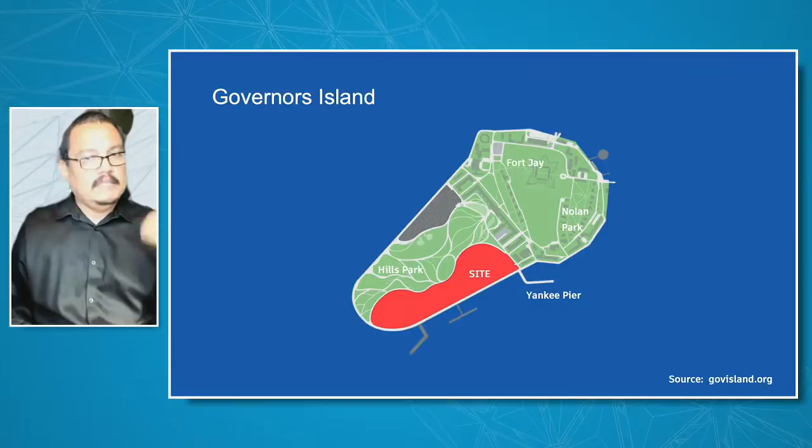The challenge imagines a resilient, transit-oriented development along a revitalized waterfront. Participants are asked to document their creative process on the following: a vision for a climate change research center that includes a facade design balancing energy and thermal performance, systems that target net zero energy, a structural design that targets resilience to storm surge and rising sea levels, public waterfront amenities, and a redesigned ferry terminal station.

So with that said, I'm very excited to introduce our first participants. Steve Smith is a senior technical designer at Walter P. Moore. He brings 20 years of experience designing entertainment venues, performing arts centers, and sport facilities. Steve leads the Walter P. Moore Parametric Modeling Group. Steve, welcome to the Design Slam. How are you today?

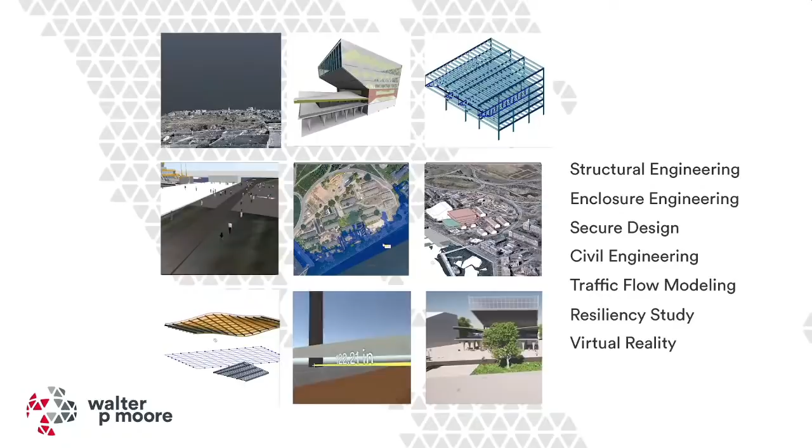Hey, Cesar, it's good to see you again. So Walter P. Moore is a firm made up of a lot of different architects, engineers, and designers—smart people who are innovative, inquisitive, and forward thinking. But what I really like about working here is that there's no egos. People like to help each other and collaborate to solve complex problems, whatever is needed by the client. This helps create a culture where everybody can do what they're good at and what they're passionate about.

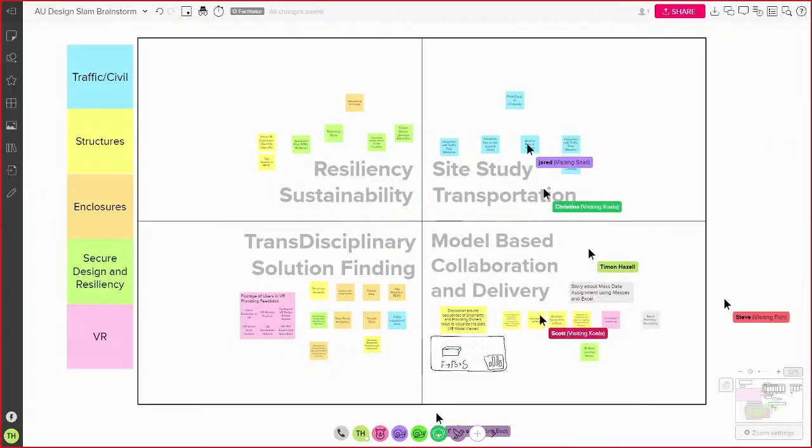When I was invited to participate in the Design Slam, I thought this was going to be 30 minutes to show just my Dynamo chops. But then I saw that we were going to need a bigger team. So fortunately, we were able to collaborate across offices and disciplines, and we assembled a team of 9 people, and then began determining our scope.

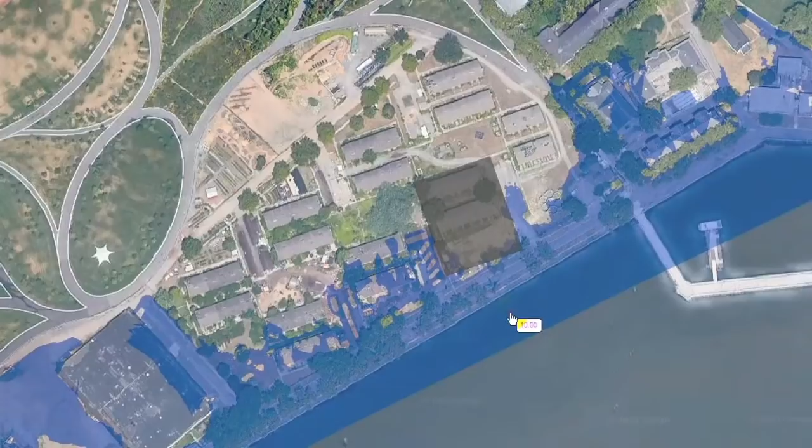We quickly realized there were some challenges here. We could see that the site is an island, so there was going to be problems with getting materials there, but also the risk of storm surge is great. So we looked at an 8-foot storm surge with a 5% probability, that's a 20-year event. We also looked at a 10-foot storm surge, which would be like a 50-year event today. But as sea levels rise, we expect the 10-foot storm surge to be more like a 20-year event in the future.

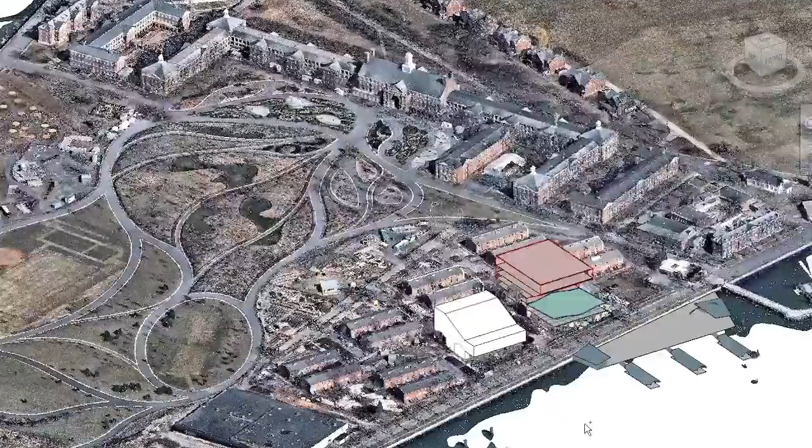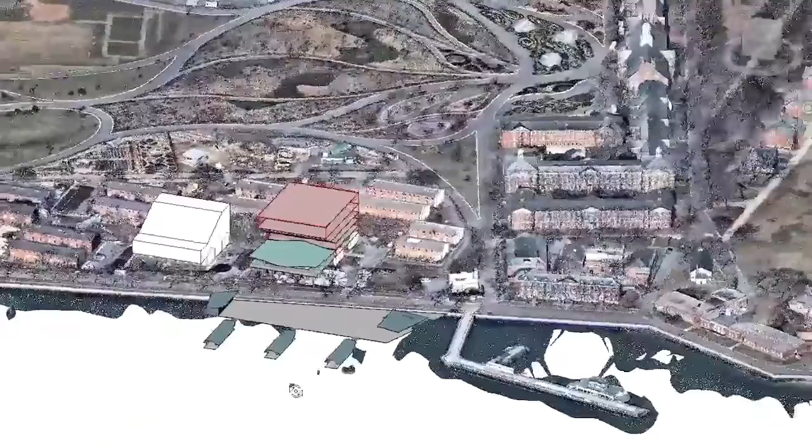Now, the center itself presented its own challenge because at Walter P. Moore, we're an engineering firm. Usually an architect comes to us with a design already in mind, and we just figure it out. Well, we didn't have that to start with. But fortunately, one of our senior technical designers is in New York City, and he's an architect. So Jared Friedman helped us come up with a compelling design for the Center for Climate Change, as well as the site. And from a sustainability standpoint, we decided to reuse some of the existing brick structures on the site.

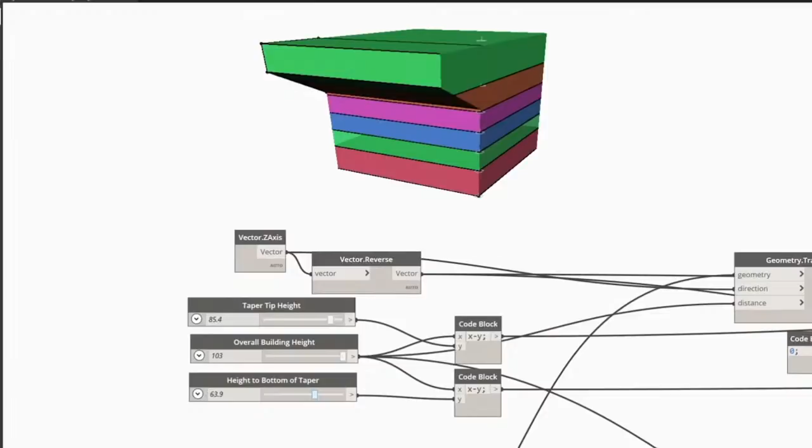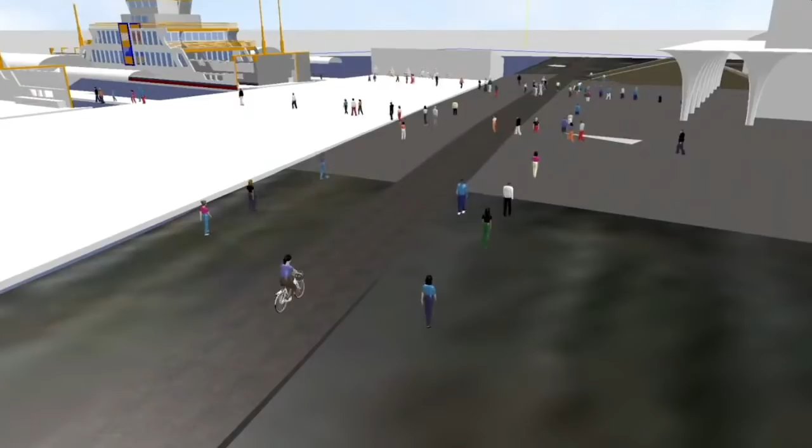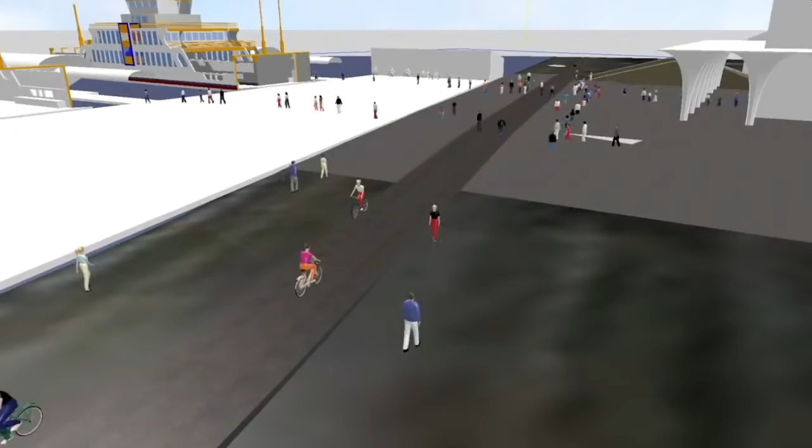The third challenge that we had here was a transportation challenge. So we consulted with our infrastructure group at Walter P. Moore, and we looked at maybe extending the subway service. We also looked at building a tunnel underneath the harbor there from Brooklyn to Governor's Island. But then we started thinking about how part of the charm is the ferry ride, and there really aren't cars there. That's something else that's nice and unique about Governor's Island. So we settled on a boat to bike concept, adding a new ferry dock with a bike rental shop and a cafe.

I'm really, really impressed by the integrated approach of your design solution. Maybe we can dig a little bit more into that.

Steve, how do you measure value and success at Walter P. Moore's digital practice? Yeah, so that's an interesting question. So like other firms, we do embed loggers inside of our definitions so we can see what's being used, who's using it. Then we're able to parse that data with Power BI to see trends when it comes to what's actually being used. We also ask our project managers to rate each one of their projects based on its digital activity or digital practice, with 0 being completely manual, no digital practice, and the other end of the spectrum being completely digital. Now, as far as success is concerned, I don't think we quantify it necessarily the same way.

Success for us has a lot more to do with our client experience. So, did we adhere to the budget? Were we able to make our project partners happy with what we delivered? Perhaps we were able to deliver more to them earlier. Were we able to accelerate the schedule? Perhaps we were able to limit RFIs, or solve problems digitally before they actually arose in the field. And so I think we measure our success a lot based on repeat business. And internally, when we do get that repeat business, are we delivering more to them each time we're hired? Are we always increasing our value to the client and to our partners?

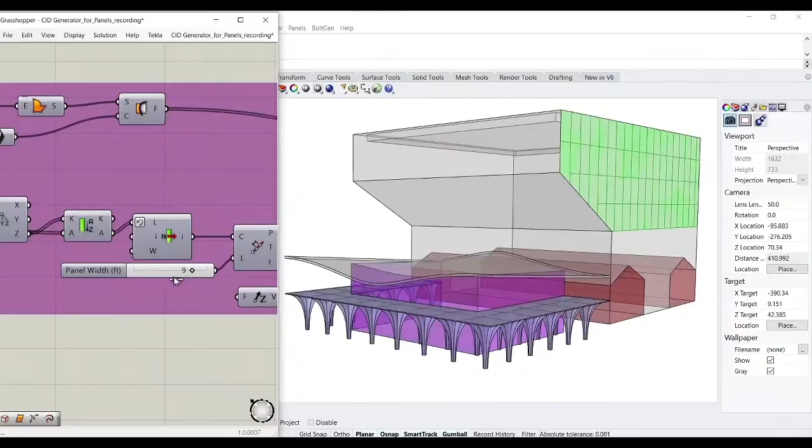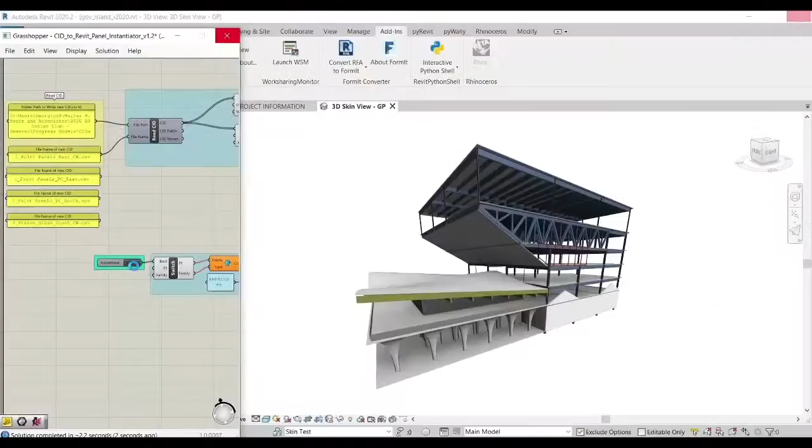While I'm a structures guy, I really like to see what's been designed in the structure. But I'm also quite aware that most people ooh and ah over the actual facade or the exterior of a building. So we had two goals when it came to coming up with an enclosure system for this building. First, it had to be visually appealing. But then second, we wanted to show off the complex structure behind the facade. So this is where our enclosure engineering group really came to our rescue. They helped us with optioneering, coming up with 3 options, with the selection and evaluation of materials, and even helping to influence the sustainability. So here we see the first option, which was a curtain wall and precast concrete system.

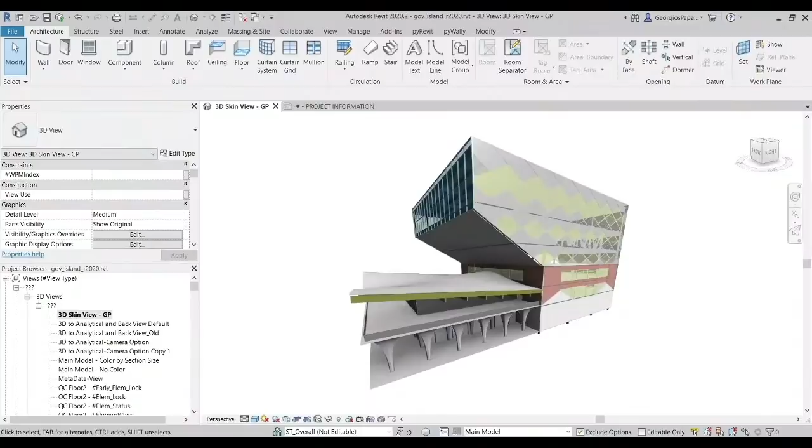The second one is a precast concrete terracotta curtain wall system. And then finally, a precast terracotta diagrid.

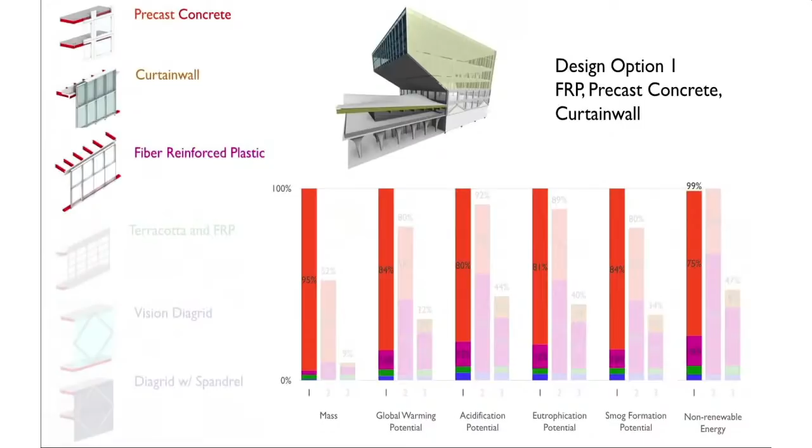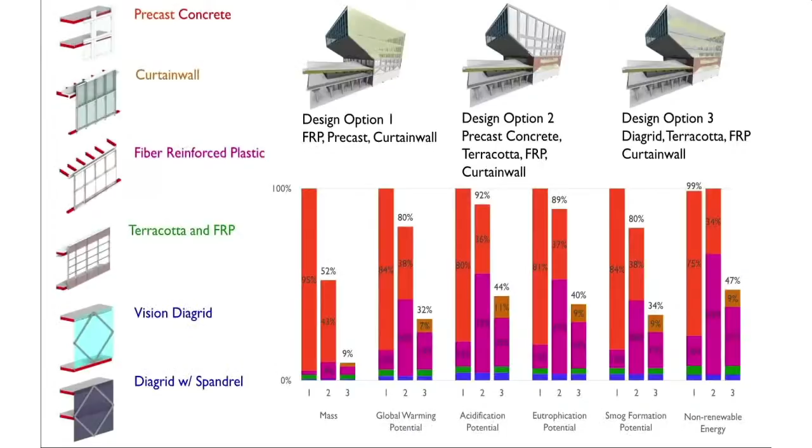Using the 3 design options and their data inside of Revit, we're able to examine sustainability by creating lifecycle assessment reports directly from the data in Revit and exporting that to Tally. These reports help us to visualize and evaluate the impact of the facade. It also helps us understand a little bit more about what embodied carbon is doing inside of the cladding system, but we also examine the manufacturing process, the installation process, how much embodied carbon is involved in the transportation to the site. And this is all with a focus on circular economy principles.

At the Welcoming Center, we created adaptive components representing the modular precast columns. This was driven mainly by construction logistics, with the site being on an island.

For the Welcoming Center, for the roof here, we developed a mass timber solution with a warped green roof. Now it's a lightweight green roof that happens to have a form of moss on the top of it. And you can see we modeled this inside of Dynamo.

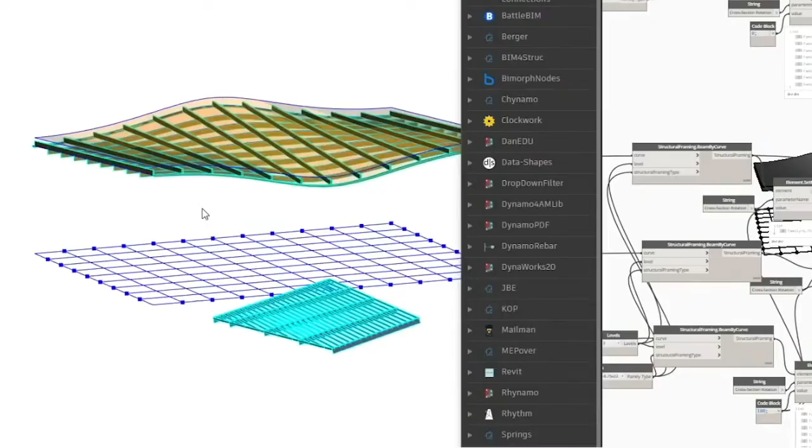In addition to this, we also modeled the dock, the piers, bike rental shop, the cafe, and all of this - the Welcoming Center, the Center for Climate Change, the dock piers, bike shop and cafe. It was all done in about 8 man hours. We actually spent more time planning it than actually modeling it.

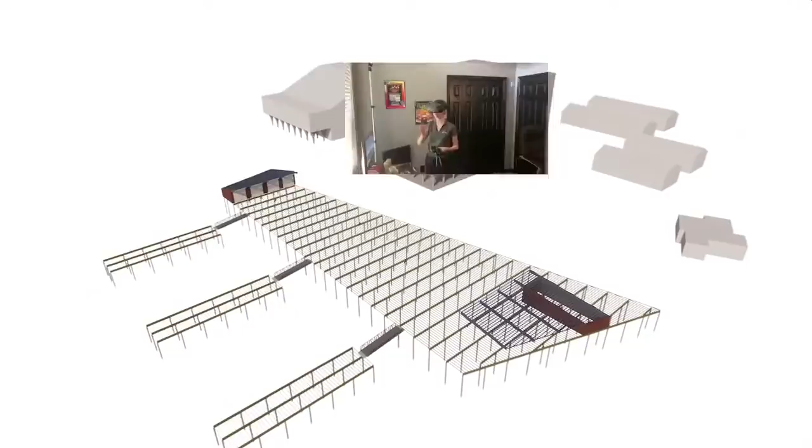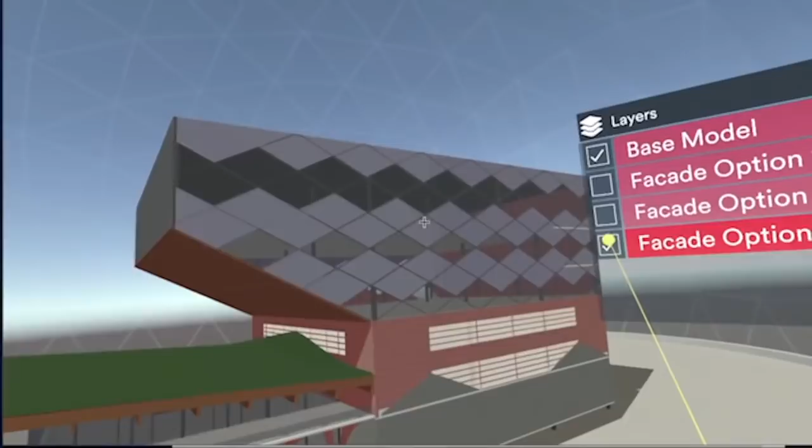Something that we've been excited about is Autodesk's partnering with Unity. A lot of the AEC community has been viewing VR, or virtual reality, as a toy or as a gimmick. But using Unity, we're making VR a valuable tool and a part of our design and coordination process. We've developed our own tool set that has assisted with this.

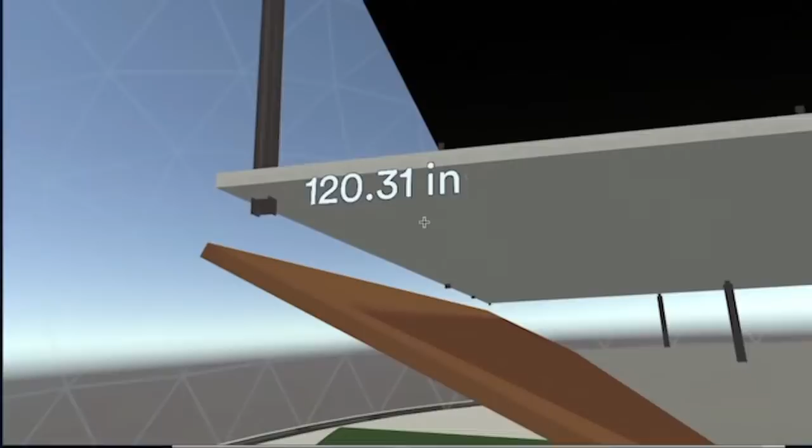You can see here we're able to, Karis is measuring out a truss. She's sketching it actually in VR. And imagine being able to sketch this in this space. We can zoom out, and then we can start cycling through the different facade systems and see what that actually looks like behind there to help the owner come up with a solution.

And finally, for the modeling of the Center for Climate Change itself, we're using Rhino inside Revit here to create repeatable geometry. We're referencing the grids and the levels that we're defining our structure directly from Revit. And then you can see on the canvas here inside of Grasshopper, we're using a representative sketch in order to lay out this definition. It makes it easier to follow if others happen to want to come on board and add something, but it also aids in troubleshooting down the line.

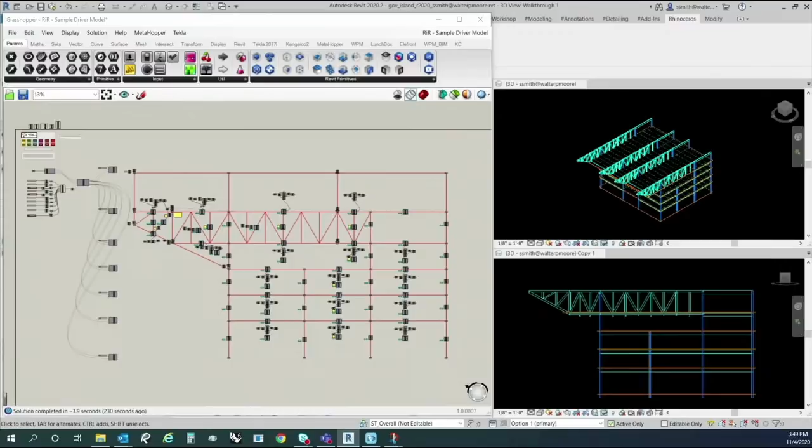And so at the end of this entire process, this is everything that we ended up modeling digitally. Nothing was manually modeled. And you can see our structure with the enclosure there.

Fantastic. I'm really enjoying the way in which Walter P. Moore managed data via computational methods and the wide range of tools that you play with. But let me ask you a little soul question. What is the ethos, design technology ethos of Walter P. Moore? What technological processes do you think differentiate you from other firms?

Yeah, that's an interesting question. I think that there's 2 things. I think that probably the first thing that differentiates us is that we don't have some exclusive group of technology experts that build all of these digital tools. That wouldn't be really true to our culture. We want everyone to be able to play. So if you're passionate about this, you want to get involved, you can. But a lot of our development actually occurs on projects. So once we have started developing some of these tools through projects, then we look to share them and scale them throughout the company. The second thing that probably makes us different is our focus on the deliverable itself.

We're committed to delivering models to our partners downstream that are machine readable and fabrication ready.

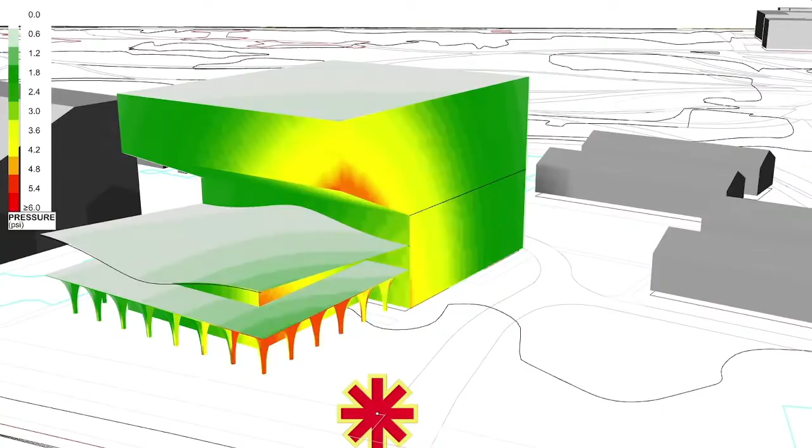Okay. Well, as we move towards delivering buildable models, the data becomes even more important. So, for example, here, Secure Design simulated multiple blast load studies around the Center for Climate Change. In this animation, it's a demonstration of a pressure impulse diagram. We're able to use this information to not only inform our design, but we're actually taking all this data and inserting it into the members itself so that we can visualize that in Revit.

Now, because we index individual framing members in our models, we're able to take this model from Revit, send it out to analysis, and then round trip that data right back in, resizing these members and making the steel data process automatic.

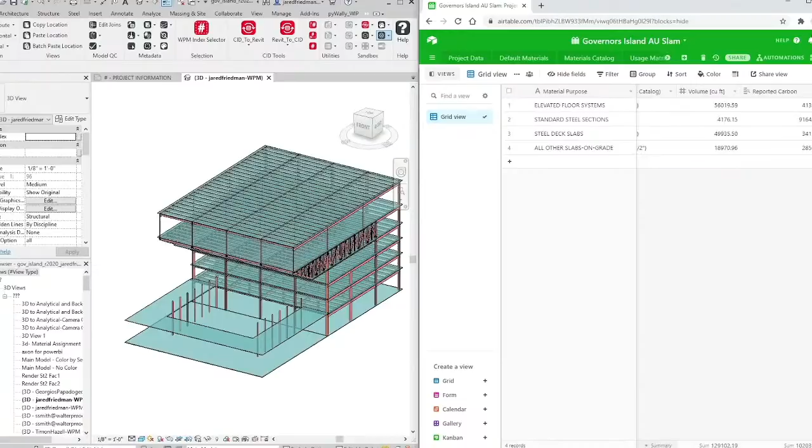Now that we have members sized, we're able to use this data in our model and calculate the embodied carbon by exporting this data out to an EC3 database. With these calculations, we're then able to import it into a Power BI dashboard.

Here you can see option 1 is a 4-truss system versus option 2, which is a 5-truss system, and we're able to have that inform our design as well.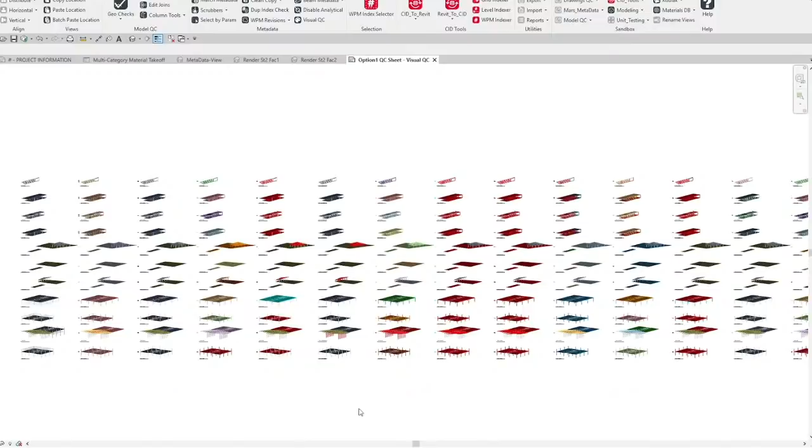But it's not just enough to have all this data in our model. We actually have to visualize the data. So this is a tool we're demonstrating that helps us generate heat maps based on metadata. The rows are zones, the columns are different parameters we're checking. In this example, we can see the different types of members we've indexed: truss top chords, bottom chords, verticals, diagonals.

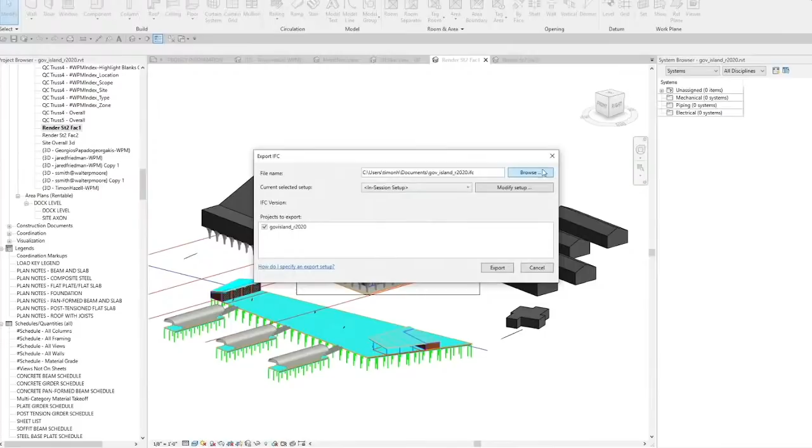And why are we putting all this data into our models? We do believe it provides value to our clients and to our project partners. So, for example, we're able to export our entire model out into an IFC and then bring this into our construction engineering's model viewer.

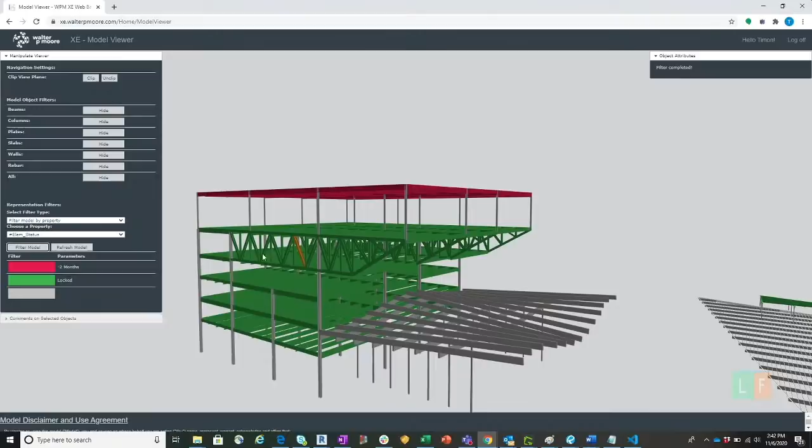External stakeholders, such as the owners, are able to verify this data in real time. Here, they're able to see what's locked and what's unlocked as far as what's being worked on. We can see the schedule, what has been released for detailing, what's still under development and design. And all this is from a web app, so it's software agnostic. Anybody who has access to this app is able to go in and view that.

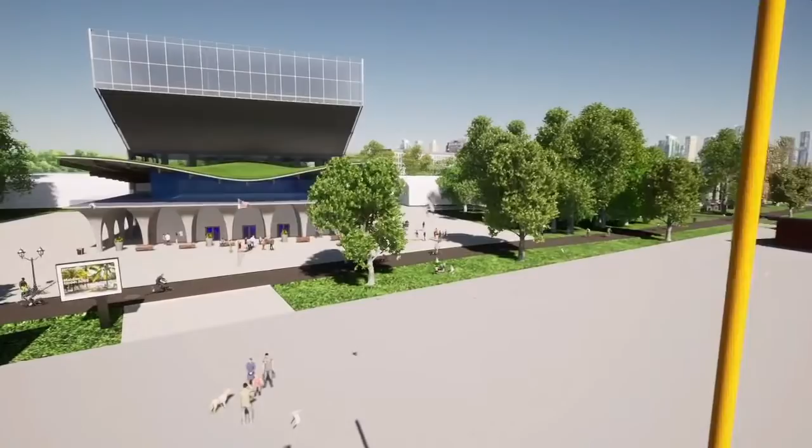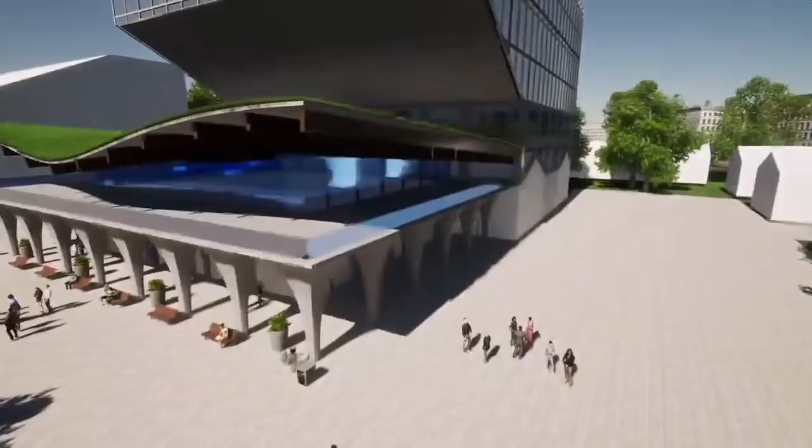And so this is the final result. After 2 weeks, I have to say 2 weeks was not enough time for us. Our first week was mainly spent coming up with an idea and then putting our team together of 9 designers across 6 offices and 7 disciplines.

And if we had more time, I would have really loved to have brought in our construction engineering group early. They could have helped us to inform our design even more so and bring this up to a LOD 400 model where we have all reinforcing and connections actually modeled.

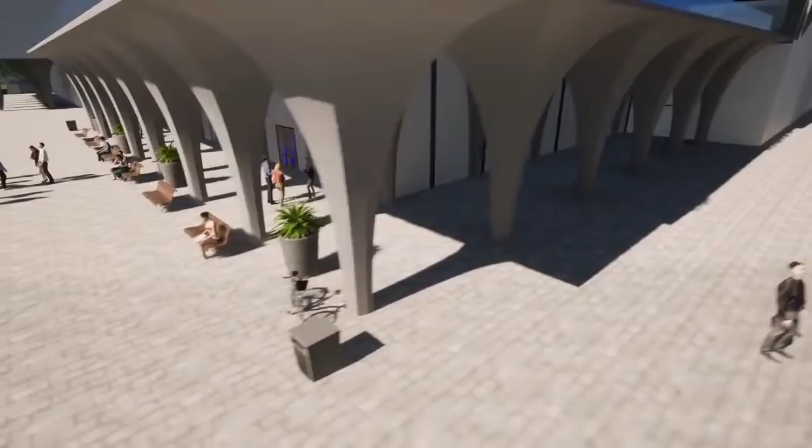Now, in the end, I will say that I'm happy with how much we accomplished in the short period of time, from planning, modeling to the analysis. It's pretty cool that we have such a data-rich deliverable. And in the next 5 to 10 years, I think this is what's going to be the deliverable. It's not going to be PDFs. It's going to be a data-rich model.

So we're not waiting for that to occur. We're making that happen right now. We want to encourage other firms to join us in adopting this type of methodology.

Wow, I really commend your ability to arrive at a design solution in such a short time frame. It's exciting to see the stream of questions coming out through our streaming channels. I'm happy to relay one for you, Timon.

What is a pressure impulse diagram? So the pressure impulse diagram is basically looking at, in that aspect, a small explosive that would have been in a backpack at that corner. The diagram shows that if there was an explosion, what members of the structure would actually be prone to the impulse and pressure from that explosion. With that, we're able to use it to affect our design because we can increase the size of members, perhaps use additional reinforcing and whatnot. Thank you.

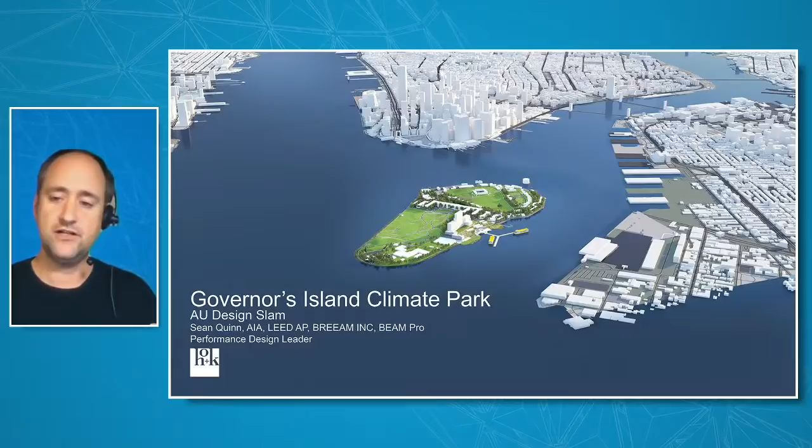So in looking at Governor's Island, we wanted to create a climate park, a space that would be available as a place to unify people in the New York area to a more open, accessible area, but also to serve as a living laboratory—both the park itself, as well as the Climate Change Center and Transit Hub—to the conditions and effects that the changing climate, rising tides, and storm surges will have on buildings.

So to begin with that, we really need to understand all the challenges that these problems are going to hit design teams with. We set out essentially a 2-week process in total for this Design Slam, from midnight Sunday about 2 weeks ago to this past Sunday. The goal here was first to understand our context: that storm surges such as Hurricane Sandy can lead to about 13 feet of rising tides, and the worst case predictions of sea level rise through climate change looks at about a 9-foot rise by about 2100.

So our goal as a practice needs to be to explore how a variety of land formations, resilient technologies, and building systems may be deployed across the site and across a building to prevent that systemic flooding, as well as the erosion that would otherwise lead to the reclaimed portions of the southern end of Governor's Island back into New York's harbor. Our methodology becomes a real understanding of those rising seas and tidal forces, the stresses they represent, both through hydrostatic as well as extreme wave forces.

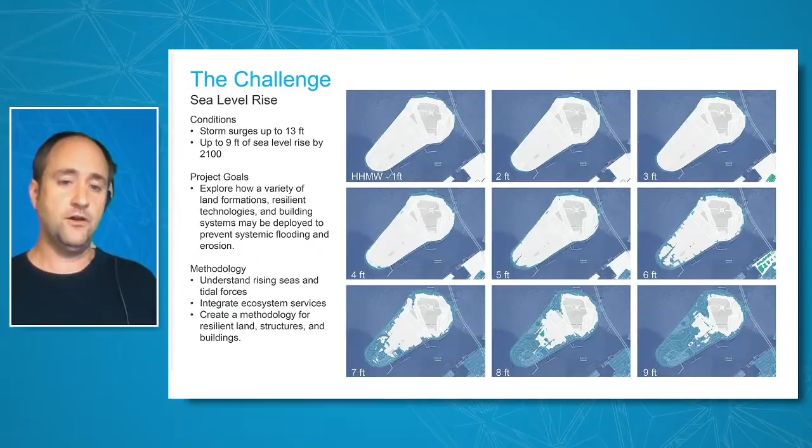And then with it, to really think about how to integrate ecosystem services, to move a little bit away from the gray infrastructure we've seen traditionally in the 20th century, to the essence of actually returning to natural systems that may be able to better withstand those events and are meant to evolve over time with those stresses. And finally, to create a methodology for resilient land, structures, and buildings.

Our E2 zone is this beautiful 20-acre site right next to the Yankee Pier on the southern end of Governor's Island. There are about a dozen existing housing buildings from the 19th century that are still standing.

We want to create a hydrological park that begins to explore the influx of those changing tides and the hydrostatic pressure that comes with rising seas.

The notion of actually combining the transit hub with the Climate Change Center is based upon a very simple premise. We need to gain greater access to Governor's Island, as well as access back to the surrounding boroughs of the city. But a Climate Change Center is going to serve really well embedded within that structure, to enable the exploration of how the forces right against the seawall are going to begin to affect this building. So the notion here is that the building, the Climate Center, can really serve as a living laboratory.

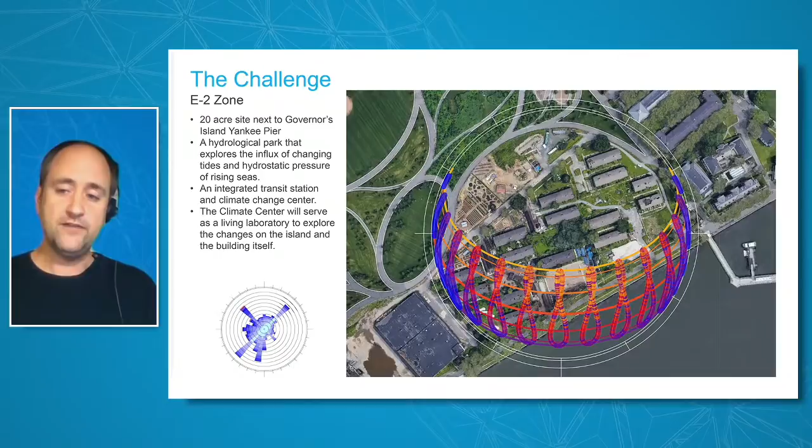We not only want to explore the changes happening with climate change, but really the effects they have on buildings. This issue isn't unique to Governor's Island or even to the New York area. These are systemic problems we see in any coastal lying areas, and even in any water-bound developments, that those rising tides are going to lead to some form of erosion or creep on building structures.

It looks like computational design is becoming the norm or the baseline expectation for a lot of these type of analytical processes. How does technology assist in the success of HOK's product?

Yeah, absolutely. So computational design is obviously bounded in the essence of being able to look at a multitude of different parameters and trying to create a singular solution from it. Trying to create a singular design from nine different stress points is a fairly complicated task.

So computational design can be used to really rapidly explore through some of those. One of the challenges we see with computational design is being able to define those metrics really clearly, so we don't have an infinite band of it.

And that's where, with our structural engineering group, products like Stream, and through the research of our sustainable design group with Climate Studio, we're really trying to investigate the best ways by which we can rapidly explore diverse and really complex geometric forms that reduce embodied carbon and also enhance operational energy, essentially trying to kill two birds with one stone.

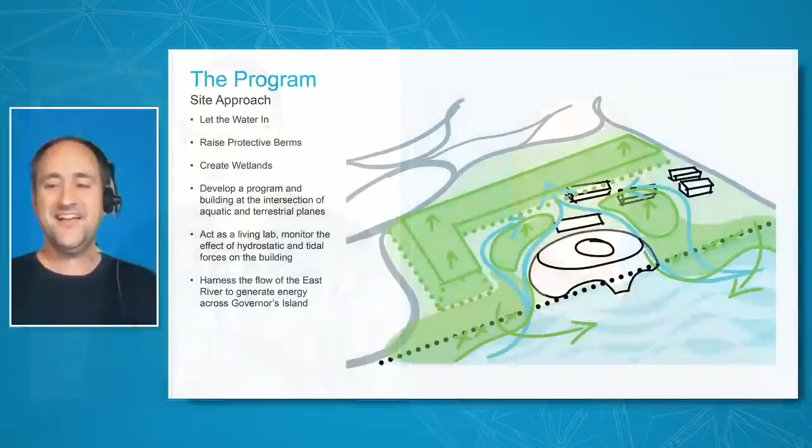So our approach to the site then quite simply begins with what always seems to be a counterintuitive one, but one that's become pretty widely accepted: let's let the water in.

Trying to create a bigger wall is only going to create another structure that is likely to be overwhelmed by some outlier event at some point. But what we can do is direct that water.

By raising up these protective berms in the middle of the site, we can direct that flow of water. We can create a series of wetlands that begin to slow those storm surges and prevent erosion of the reclaimed soils on this island.

Ultimately, we need to develop a program that begins to house and nestle itself at that intersection between the aquatic plane and the terrestrial. But for the building to act as a living lab, we want to monitor the effect of these hydrostatic and tidal forces on the building.

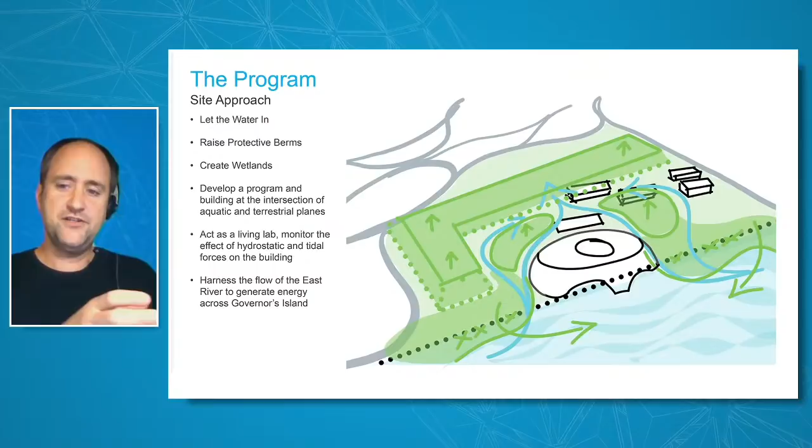But then also, as we began to explore further, it'd be good to look at how we could repurpose some of the existing buildings on this site. Ultimately, we want to explore some further energy solutions. So how can we actually use climate change to our advantage? Harness the flow of the East River to actually generate energy across Governor's Island.

As you see here, as we go from the very simple sketch to our VR model, you begin to see how we begin to shape the overall topography of the site. We begin to create definitions around the areas that can be wetland versus transitional versus tree canopy. This complex ecosystem of services intends to have the land and sea act as a sponge that is able to absorb, capture, and slow those tidal surges, and reduce the amount of flooding and erosion that happens on site.

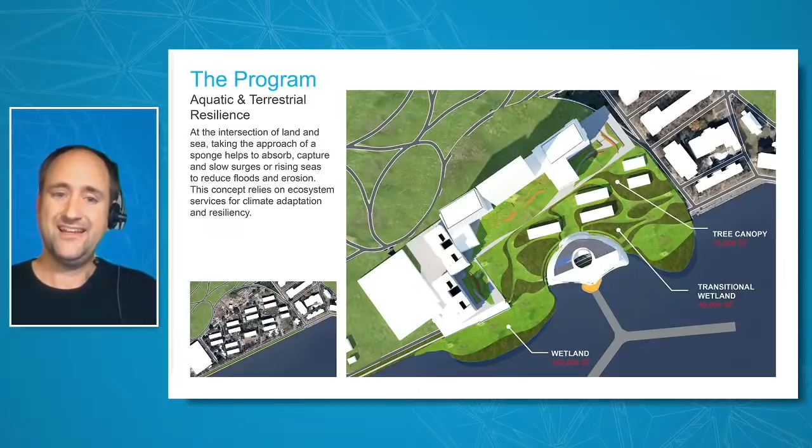At the heart of it is really an understanding of where we want some of those floods to begin to influx into our site. So the higher high mean water table—just the existing current condition—we're about 4 feet below the seawall. The actual seawall isn't breached until about 5 feet of sea level rise. So the first goal is to essentially erode the seawall around our stretch of site, raise up that topography, allow the mixed use development to grow, and then build out the building at the thrust point of that.

The first existing building begins to get hit by that 5 feet of sea level rise—it's actually in the middle towards the back. And as we hit 7 feet, the next two buildings begin to be absorbed by water. This allows us to study that first building, leaving it untouched, to understand how hydrostatic forces affect it, and for those 2 future buildings to do a moderate or extreme retrofit, helping us understand how to take a typical approach to modernizing buildings as well as a more extreme approach to deal with extreme pressures.

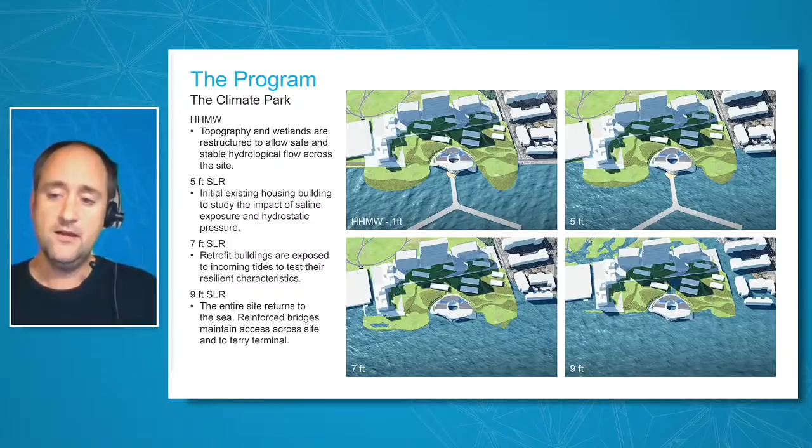Once we get to 9 feet of sea level rise, we have a different playing field. That event, as noted previously, is far too likely to become common as an every 10-year event, and in worst case conditions, by the end of the century, might become our new static condition. And as we know people will continue to build in areas that lie within that 9 feet of sea level rise, we need to explore how new buildings can withstand not only those forces, but the long-term effects a saline environment would have on building structures.

So I'll begin by looking at how we build resilience through retrofit. The goal here is to look at how these higher wind loads and sea flood loads—which can comprise 5 to 10 times the amount of force a normal structure is designed to handle—can be retrofit to deal with some of those extreme conditions.

The 3 existing buildings that remain within the climate park act as a feature. They serve as a teaching tool for the impacts of climate change on the built environment and the options for addressing them. The first building we leave untouched, and it will be intentionally flooded with 5 feet of sea level rise. This enables us to study the existing building and its technologies and how they react to those changing tides.

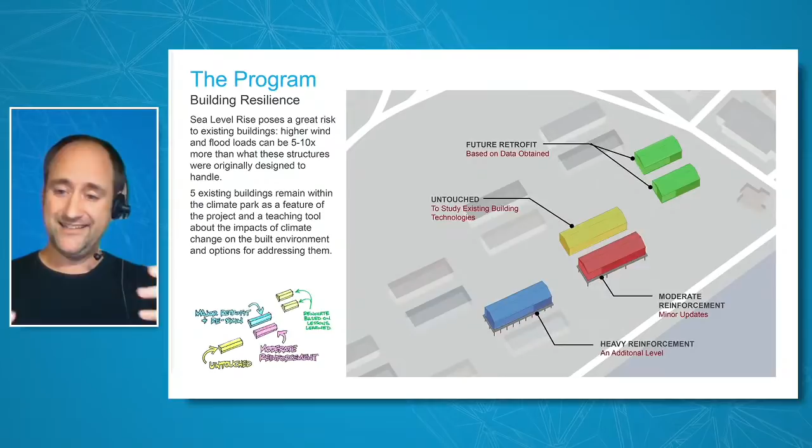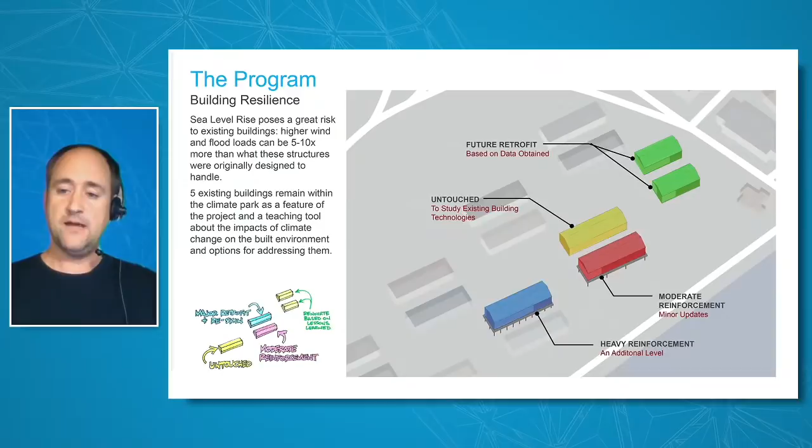A moderately reinforced building is meant to address how we can affordably create minor updates that enable a building, in its existing state and purpose, to withstand some of those imminent pressures. Over time, looking at more heavy retrofit options—how can we provide future life to these structures through heavy reinforcement and additional levels—these future retrofit options are able to take on the best of both of those approaches.

The moderate reinforcement is based on common principles. Any type of hurricane proofing you might do typically results in about a 5% increase in the cost to the building structure as a whole. The notion is essentially strengthening the foundations for increased wind and flood loading, wet flood proofing for the building, and updating some of the external skin.

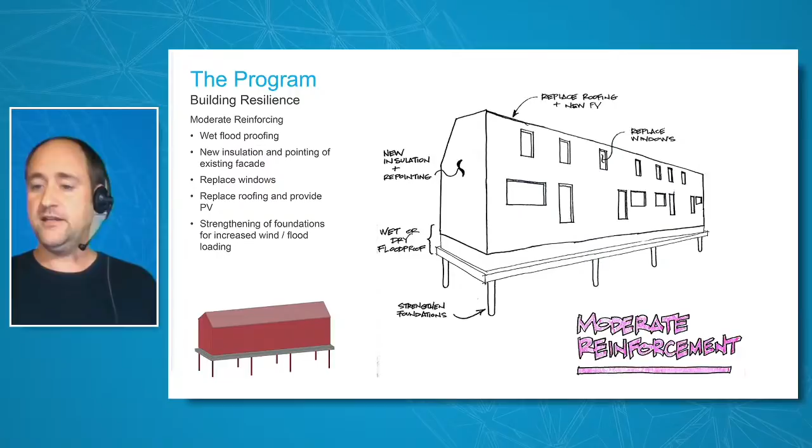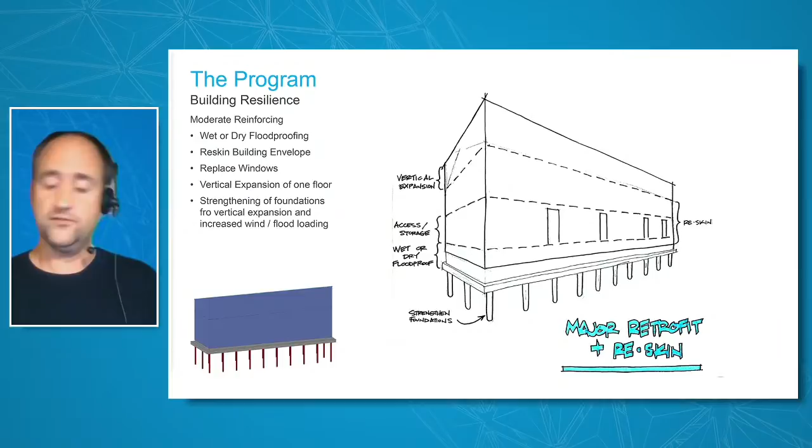The more extreme major retrofit and reskin is around not just reinforcement of those conditions, but actually expanding the building and allowing it to load up to deal with hurricane level forces—150-mile-per-hour winds and beyond.

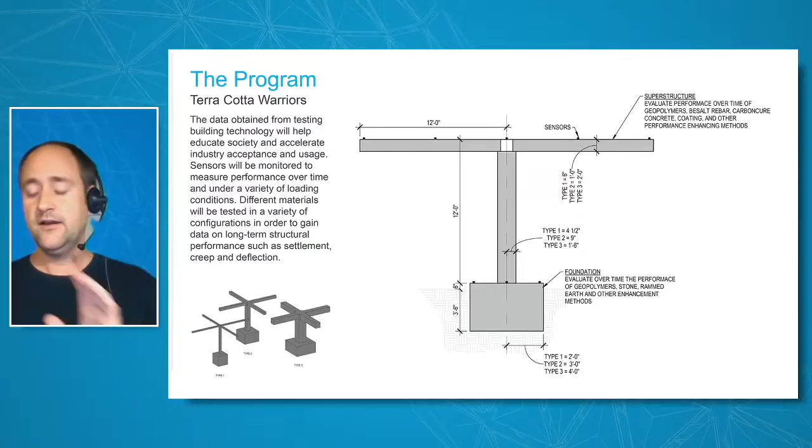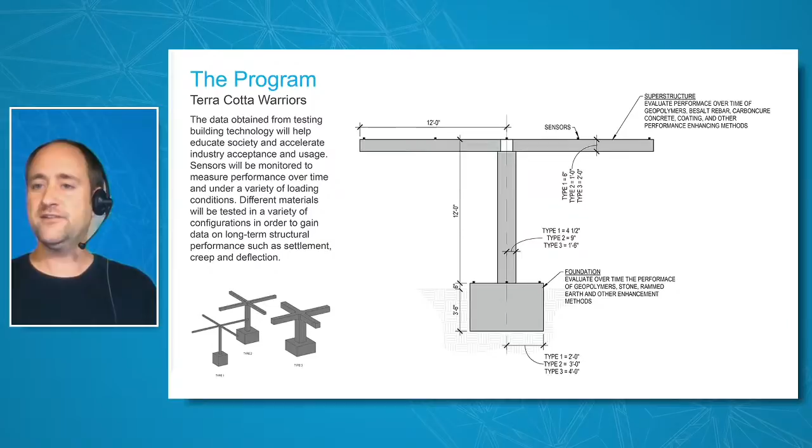We know that not only would any of these individual buildings serve as a nice observation point to understand those conditions, but there are a variety of other conditions across the East River and Red Hook, in Lower Manhattan and Jersey City, by which we need to understand how building foundations, columns, and beams begin to creep, deform, or settle as a result of incoming pressures. So what we'd like to do is create a series of what we've jokingly called Terracotta Warriors—floating sculptures embedded within the lower lying areas of that topography. We place sensors on them so we can evaluate the performance over time of geopolymers, basalt rebar, CarbonCure concrete, coatings, and other performance enhancing methods.

What gets really exciting, and the real critical focus for us for the majority of the 4-day active design charrette process, was looking at the Climate Change Center and Transit Hub. And I think it comes to the crux of the mission we have with the Design Slam: how can we take a multiple diversity of talents, disciplines, skill sets, and tool sets in order to design a building in a very rapid period of time across all of these different metrics?

Beginning from initial brainstorming, sketching on concept boards, ideating with a diversity of a team, to initiating design across different modeling and sculpting software, to analyze structural integrity, as well as addressing embodied carbon, onto the environmental analysis, and finally visualization—a critical piece of this process by which we begin to tell the story.

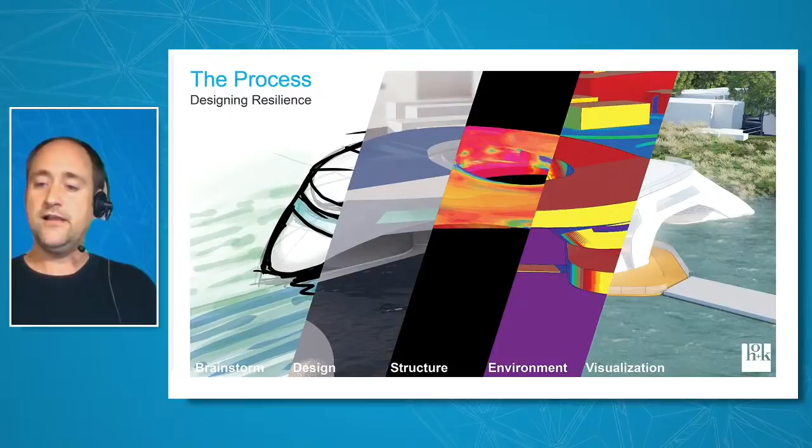Advocacy becomes one of the most important tools in any designer's belt. We need to serve not only as a provider of a response to a client's brief, but as an opportunity to demonstrate challenges they may need to face, whether they realize it or not. That visualization process enables us to show a real depiction of sea level rise early on.

Excellent, Sean. I'd like to pause you here for a couple of questions.

From the technology perspective, in a landscape of a wide range of competing design technology solutions, what differentiates you from other firms? How do you define HOK's ethos and approach to technology?

HOK is unified by the building smart foundation and methodology, really initiated by our former chairman Patrick MacLeamy, which evolves into the final execution of delivery of projects through BIM, most likely Revit, but across the full spectrum of a project, from ideation to execution, a lot happens. In the 4 days we worked on this project, we utilized over 20 different digital design tools.

Our advanced design technology group has two key functions. Number one is the enviable task to work across every different discipline, understand the different needs of individuals, and find the right ecosystem of tools we can draw from. And perhaps the less enviable task of making sure all of those different tools communicate widely with each other. This is a common challenge every design institute faces, Autodesk faces too—we are, to a certain extent, creating a Tower of Babylon out of different software tools, but we have this wonderful diversity by which we can identify and solve for all of these different challenges.

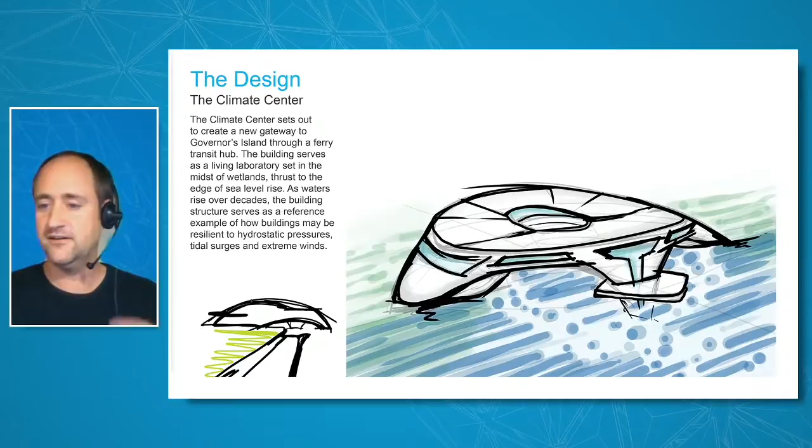That helps us get to the next phase, which is solving a multitude of design challenges in one singular area. So trying to create a climate center was based around the idea of being a living laboratory, that this building structure would serve as a reference of how buildings may be resilient to hydrostatic pressures, tidal surges, and extreme winds. Very simply illustrated here are my hand sketches, which are then beautifully translated through the programming work of Rafael Gavianes and the design sculpting work of Weijia Wu, to go from the thick black marker to not only a program that works and fits, but that meets the sculptural identity being attempted here.

And the translational work that our design technology manager, Francis Sebastian, did to connect between Rhino and Grasshopper and Revit and Dynamo through the use of Speckle and other design tools.

The focus of the building is that in 2020, we want to have a pretty typical ferry terminal on the ground level, and on the second floor, a climate change research center. As the tides begin to rise, that program flips. The research center actually submerges to explore the impact that tidal surges have on the building structures and materials, while the ferry terminal rises with the seas, and that second floor office area becomes a concourse out to the ferry piers. The third floor stays as an exhibition center and an observation level to look over all of Governor's Island, as well as New York Harbor.

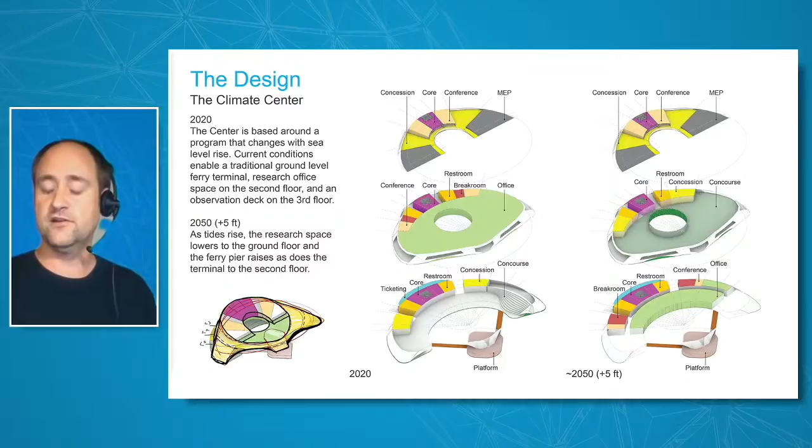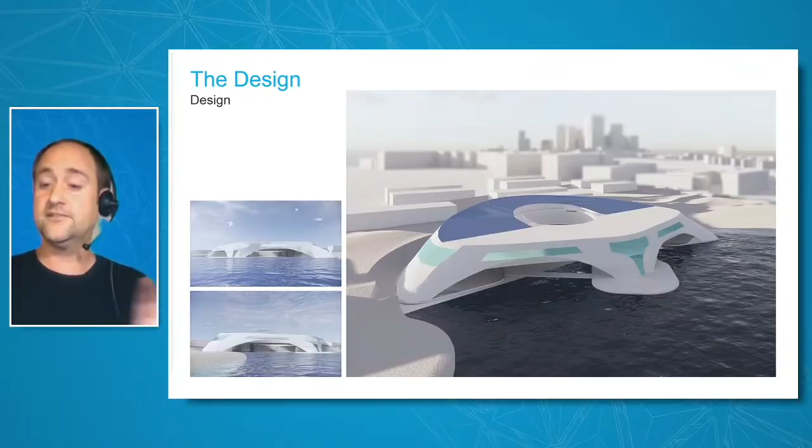As we begin to look at that sculpting work, looking at how the vault became a real driving form for our design, we began to integrate almost this notion of a glacier, that the building, as sea levels rise, would almost represent the changes happening in other parts of the world. The 15,000 square foot PV canopy, the roof of this building, more than supplies the necessary 23 kBtu per square foot per year to make the building net zero.

The next step is to really prove, well, is that the right form at all? Our structural engineering group is wonderfully creative, not only exploring through the use of Kangaroo and other Grasshopper tools how best to optimize this form, but really understanding the multitude of stresses this building is going to take: thrust and gravity loads, not to mention space, aesthetics, costs, embodied carbon, and of course the external forces.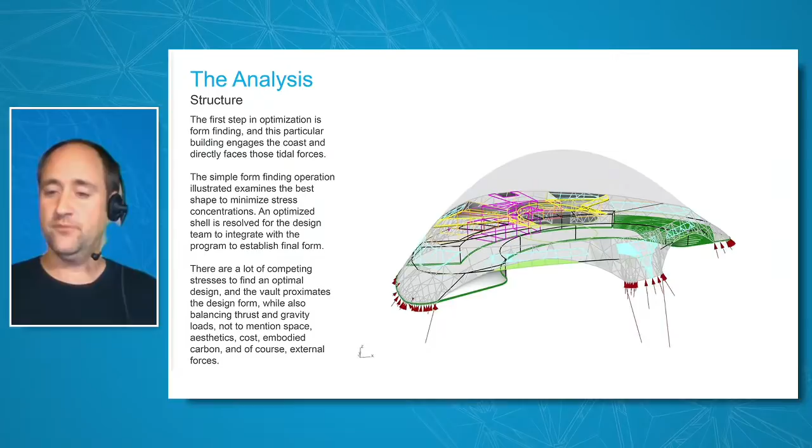Visualized here is the continuation of that vault if it was a unified shell. And then through an SAP analysis, we begin to visualize the balanced and unbalanced stresses of the vault, where the long spans and tension rings will have a few weakness points that need to be reinforced. But for the most part, the notion of a vault actually responds fairly well to the lateral force loads that this building is going to need to take.

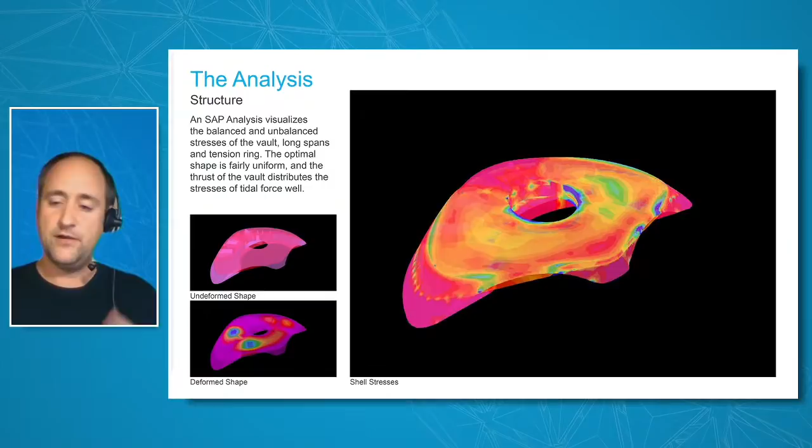Speaking with Anders Carlson, he noted that it was like trying to squeeze an egg, that essentially that tidal force against the building was going to enable it to be structured really well. With Matt Bridenthal and Daniel von Briesen, we were able to structure rapidly and quickly some of the structural notions and ideas that begin to bring reality to a very computational design form.

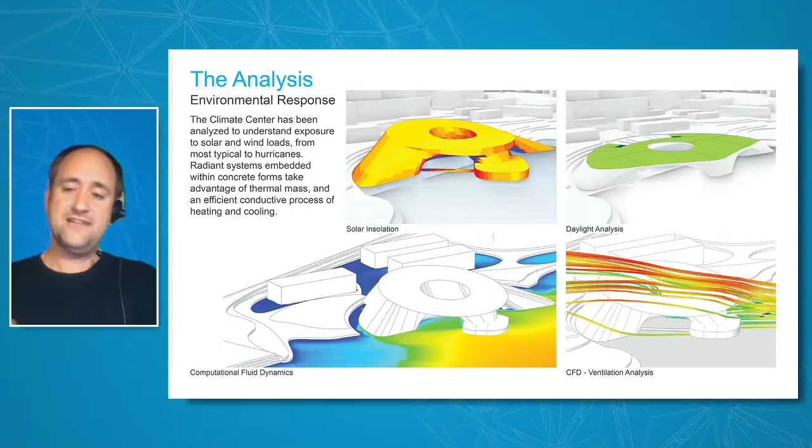Patricia Piedrafita, one of our environmental specialists, began looking at some of the typical notions of solar exposure over the building, as well as computational fluid dynamics for extreme wind forces, as well as how those begin to bring daylight into the space, as well as natural ventilation. All of this enables us to get a more granular understanding of both the environmental challenges, but also the opportunities that we have here.

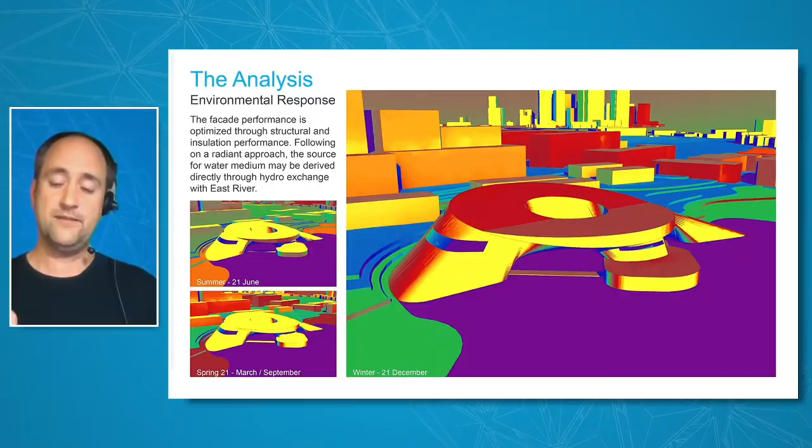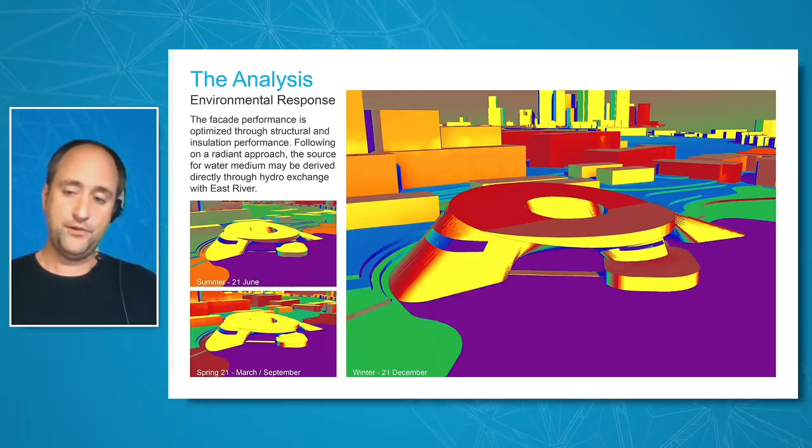By relying on a concrete-based form and a thin-shelled vault, we can really take advantage of that concrete mass as a thermal ingredient. Integrate that with radiant panels that can serve both hot and cool water that maintains comfortability for the extreme events of summer and winter, and allow natural ventilation and the removal of that cool or heat through those radiant panels throughout spring and fall. And so we get a very low energy building, not only because of an advanced system, but because of the complement that it plays to the structural systems put in place.

And so that comes down to really the true metrics of building. While we're trying to solve a very complex challenge of climate change resilience, we also want to make sure that this building represents the ideal of what a building should be: a low embodied carbon, as well as a positive net energy building.

Devki Desai worked really closely with the structural engineering team, with our design team, to explore a host of different structural materials, fiber reinforcement, and to cast thinner and reduce the material quantities, and a geopolymer concrete that could lead to a 55 to 70% reduction in the embodied carbon. And that gets us to about that 70% reduction point, which is fantastic.

And that's then made up partially by some of the research that Max Driscoll and Blanca Dazi Espouge did in the sequestration that the ecosystem services could do, that the landscaping itself could capture an additional 10% of the carbon that's left. I did the energy modeling with Insight, which essentially targets out an energy use intensity, or EUI, goal between 18 and 22.

The PV, as I said, makes up about 26. So we're already net positive.

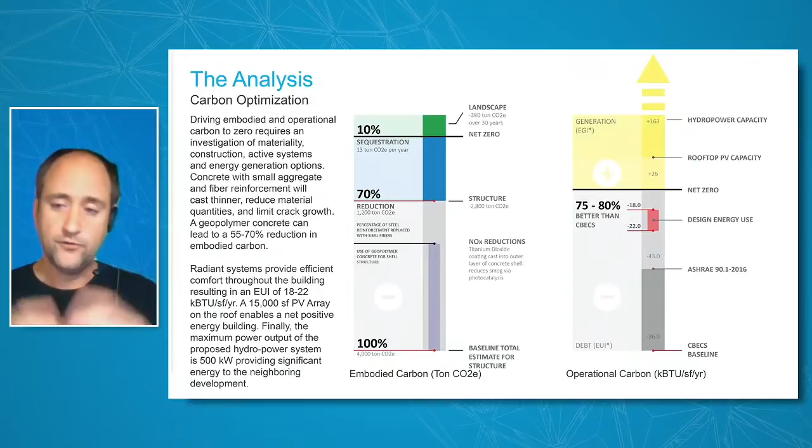But the notion of actually trying to create that centrifugal form enables us to take advantage of some of the tidal forces in the East River. If we can capture even only a portion of those 4 knots of typical flow, let's imagine about 1.5 knots conservatively, we can generate a 500 kilowatt hydropower station inside of this building. And so as sea level rises, we can actually convert that into energy to service the development that's risen onto a higher berm.

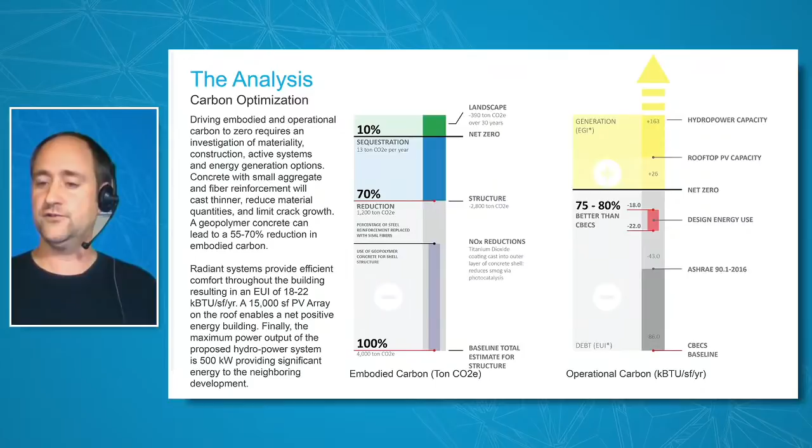And while all of that's really exciting, it's the narrative that comes down with almost working with any client, as well as the unification of all of these different ideas, stresses, and analyses into a final form.

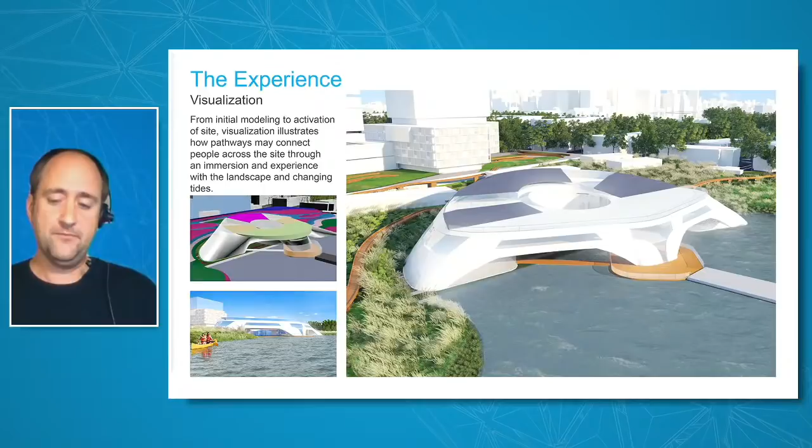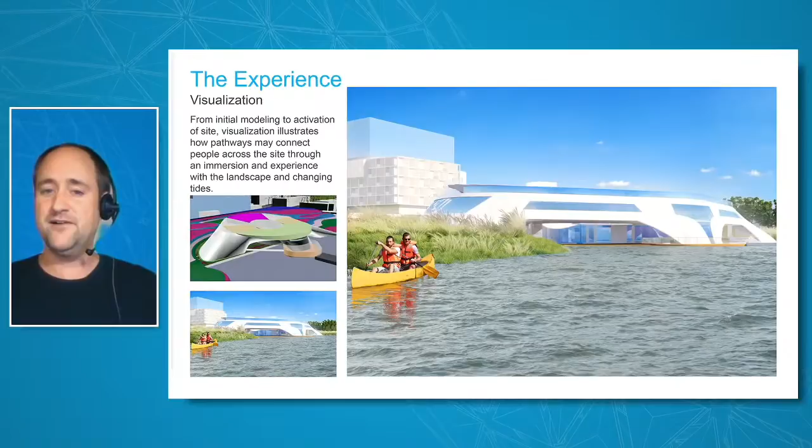Rotimi Sariki is an amazing visualization specialist within our team and is able to bring to life the narration of this story. One of the things we haven't really begun to analyze most efficiently is what it looks like to have sea level rise begin to influence some of these spaces. Through a series of very simple visuals, and then through a VR module, we're able to explore how over time, a series of pedestrian pathways goes away and transforms all of the secondary nodes of travel to a primary node of travel by water, and the exploration of different aquatic sports in its stead.

As we pan out into the development, the wetlands can provide another means of a groundscape instead of the more traditional lawns associated with most parks in the New York City area.

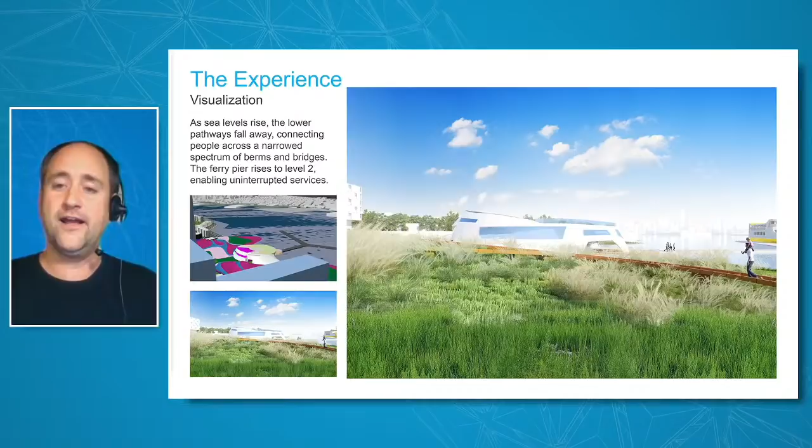And ultimately, to really imbue the sort of long-term resilience in these flood-prone areas, we need to accept that portions of this development will be inaccessible for times of the year, and we should celebrate that through a multitude of pathways that enable a diversity of experience. While we want to mitigate as much as we can the impacts of climate change, we should celebrate the transformation of our land as best possible while being as resilient as possible.

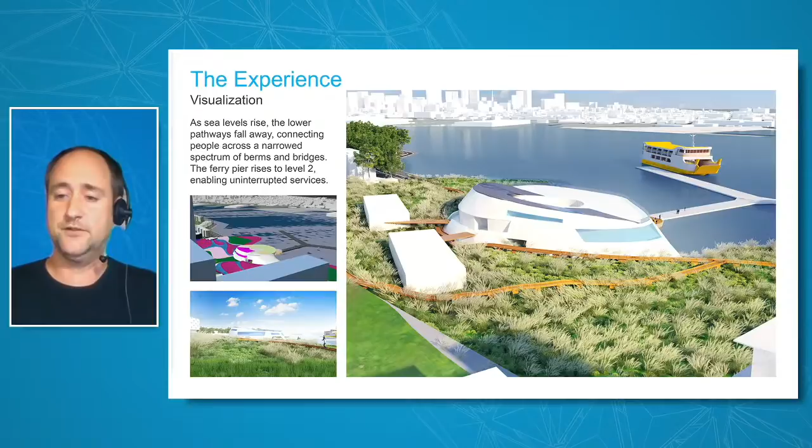I'll close with the final image, which begins to look at what Governor's Island Climate Park can look like, not only as a representation of the opportunity that Governor's Island has, but the opportunity that we have as an industry to begin to identify and really address some of the systemic challenges that we see facing the AEC industry, as well as the general populace and cities around the world.

It takes someone coming together to present a big, hairy, audacious task. So I thank Autodesk for doing that. But I really want to thank both my team as well as teams everywhere around the world that are trying to address these issues, whether it's through a 4-day sprint, a 4-month exercise, or 4 years or more of trying to create resilient ecosystems in the cities and places of nature that we love to live in. Thank you.

That is fantastic, Sean. I am really inspired by the way HOK is utilizing tools to address these really complex problems. I think we have time for a couple of questions, and I have to ask you this.

What can software companies like Autodesk do better to equip designers with tools that allow you to solve these increasingly complex challenges? We can see Governors Island embodies very important impacts like rising sea level, affordable housing, public policy, environmental justice — all of these factors are increasingly on the palette of variables that an architect needs to address.